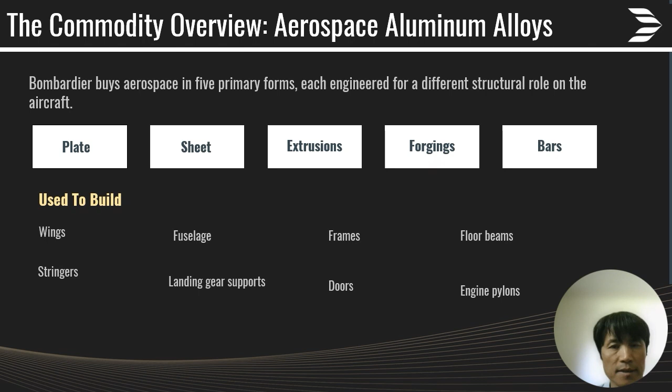This aluminum product goes into essentially every major structural section of the aircraft: wings, fuselage, internal frames, floor beams, stringers, landing gear, support structures, doors, and even engine pylons. In short, aluminum is the structural backbone of the airframe, which is exactly why the grade and form purchased has to be exactly right for each application.

Here are 4 common grades our buyer works with. 2024-T3 offers high fatigue resistance, excellent strength, and good machinability, so it is used for wing skins and general aircraft structures.

7075-T6 is one of the strongest aluminum alloys available with excellent stress resistance. It goes into the spars, bulkheads, and other high-load structure components. 7050 offers better corrosion resistance and is used for thick structure parts, and 6061 provides moderate strength with good corrosion resistance and easier fabrication, making it useful for general fabrication needs.

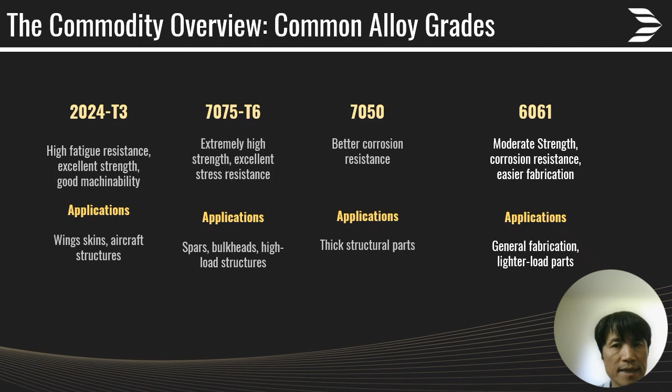Choosing the right grade is a balance of strength, weight, corrosion resistance, and cost.

Two more quick points before I head off. First, packaging. Aluminum shipments arrive protected with plastic film, wooden crates, moisture barriers, steel banding, identification labels, and heat treatment certification, so the materials stay traceable and undamaged from the mill to shop floor.

Second, classification according to the Aluminum Association. These wrought aluminum alloys are identified using temper designations like T3, T6, and T7451, which describe how the metal was heat treated and strengthened. That classification system is what lets buyers, mills, and inspectors all speak the same language when specifying and verifying material.

Now I'll pass it to my teammates to cover quality and inspection.

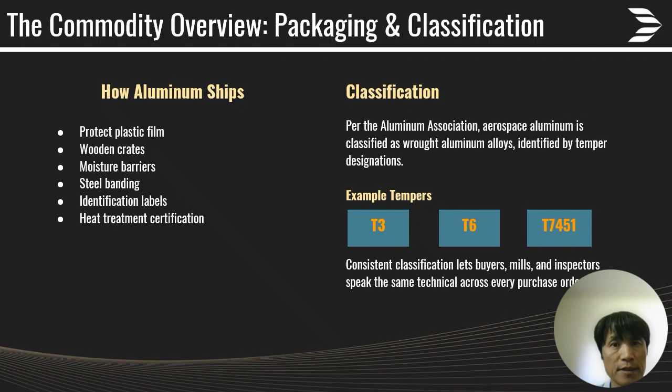All right, now on to the supply and demand section. First of all, pricing for aerospace aluminum comes down to 6 specific levers. First, energy cost, especially electricity, being highly critical in aluminum production. Second, bauxite mining and alumina refining. Of course, the United States dollar, as aluminum is traded in USD, and the classics being transportation, tariffs, and supply chain disruptions.

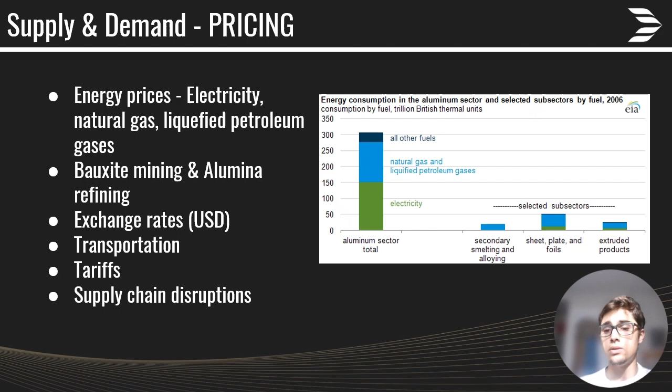Now on to suppliers. First of all, domestic suppliers include Rio Tinto and Alouette Aluminum, which are affiliated and are a major supplier of primary or non-recycled aluminum.

International suppliers include Constellium in France, which is a major supplier of aluminum for the global aerotech industry, several US suppliers including Novelis, the largest aluminum recycler—not as good as primary aluminum, but still usable in the aerospace industry—and high-quality aluminum from suppliers like Hydro from Norway.

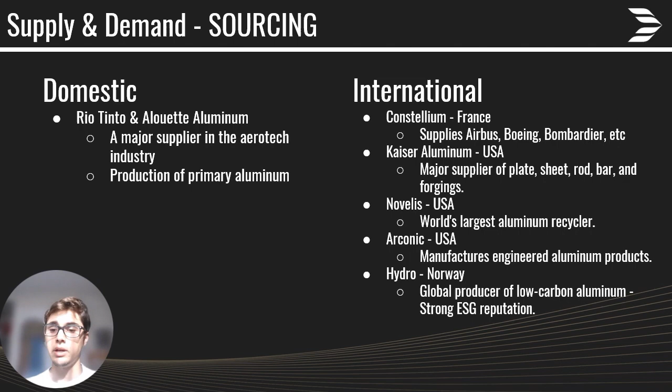Zooming into the 2025-2026 trends, demand is climbing with overall higher demand for aircraft production across multiple sectors. US tariffs doubled to 50% in mid-2025, and Middle East disruptions threaten up to 3.5 million tons of global aluminum output, pushing the LME, or London Metal Exchange, benchmark prices to record highs. This directly shapes procurement priorities.

First is supplier quality management through requirements like the International Aerospace Quality Group standards and AS9100 certifications, environmental, social, and governance due diligence, currency exposure via LME pricing, and material availability tracked through sources such as United States Geological Survey data.

Getting into the customers, demand is driven by corporate flight departments and ultra-high net worth buyers, impacted by corporate profitability and general wealth. Another type is charter and fractional operators, businesses impacted by more technical factors such as aircraft replacement cycles, and government and defense customers, impacted by general global unrest, GDP, and defense demands.

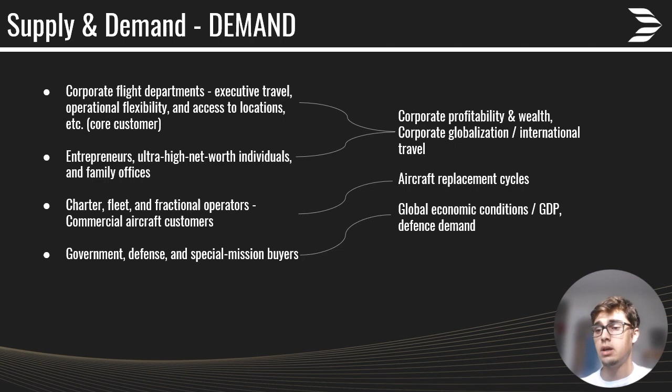Finally, quality also has to be verified through inspection. When aerospace aluminum is received, inspection can begin with checking documentation and visually examining the material for damage or surface defects. Dimensions such as thickness and other tolerances can also be verified against purchase requirements.

Depending on the material and specification, additional testing may be required. For example, ultrasonic testing is a non-destructive method that can detect internal discontinuities without damaging the material itself. Hardness and electrical conductivity testing can also provide information about the material condition.

From a procurement perspective, this is important because non-conforming material can result in rejection, rework, additional cost, and production delays. Therefore, quality inspection helps ensure that only materials meeting the required specification move into aircraft production.

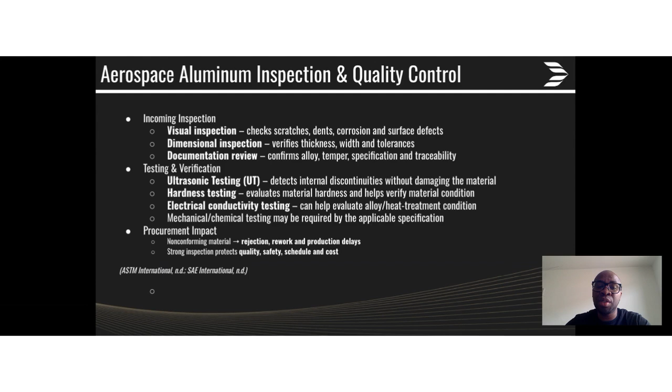The next part of quality control is certification and traceability. In aerospace procurement, buyers need documentation that provides evidence that the material received meets the required specification. Material documentation can identify the alloy and temper and provide results for chemical composition and mechanical properties. A certificate of conformance also confirms that the supplied material meets the specified requirements.

Traceability is especially important. The material and its documentation are connected through identifying information such as lot, batch, and heat number. This allows the organization to trace the material back through the supply chain if a quality problem is discovered.

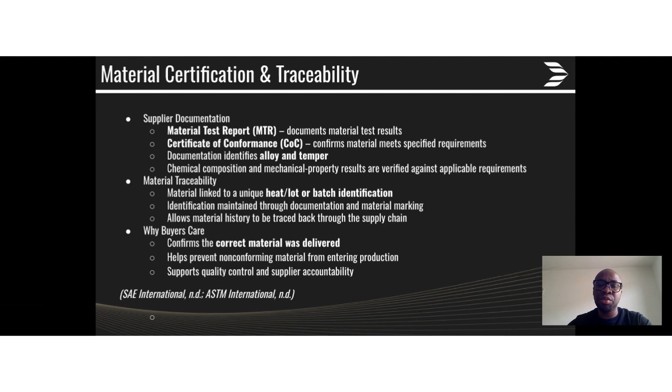When we talk about quality in aerospace aluminum, it is much more than simply checking whether the aluminum looks good. The material has to meet specific technical requirements. For example, ASTM B209 covers aluminum alloy sheet and plate.

This includes requirements for different alloys, tempers, and mechanical properties. Some important technical measures are yield strength, which tells us when the aluminum begins to permanently deform; tensile strength, which tells us the maximum stress it can withstand; and elongation, which shows how much the material can deform before breaking.

Fatigue and corrosion resistance are also important considerations because aircraft structures experience repeated loading and environmental exposure throughout their service life. From a procurement perspective, this means the buyer needs to purchase the correct alloy, temper, and product form according to the required specification, rather than simply ordering aluminum.